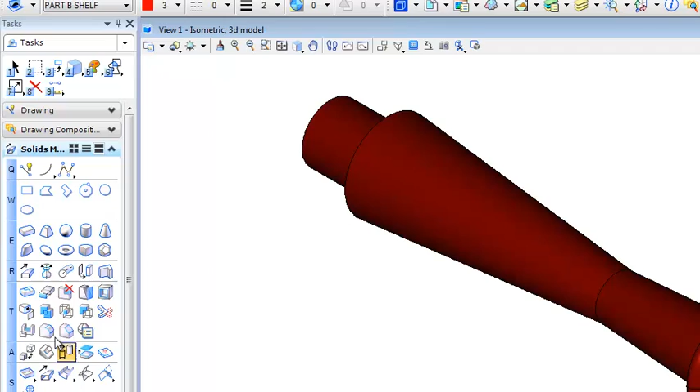It doesn't look like it's on a wood turner, so we got to smooth this edge out. So we'll put a fillet edge on. In addition to making outside curves, we can change this to say a 2-inch radius just to try it.

Left click right on that circle. You can see it smooths it out. Not quite enough though, so let's try a 4-inch just to see what that looks like.

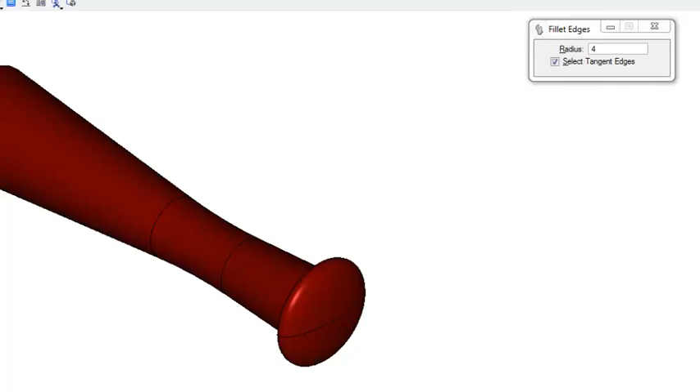There we go. So if we actually spin this around, we can see we got this nice dowel appearance, similar to what's shown on the drawing. So it's not going to be exact, but it's going to be close.

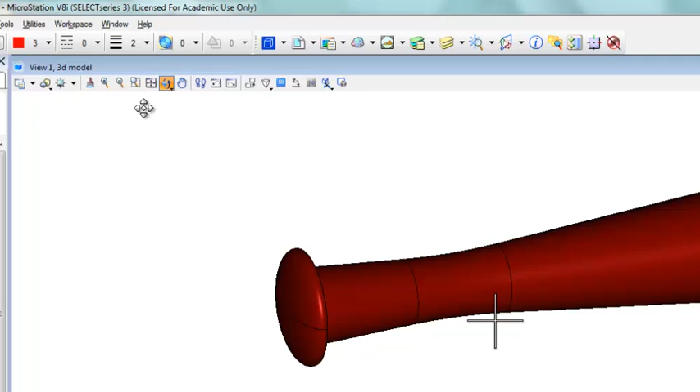So we know we made this peg a little bit shorter to fit in the hole, so we're going to have to determine how we want to put that in there. So I'm going to go back to a wireframe. We'll do a fit view and change it to an isometric.

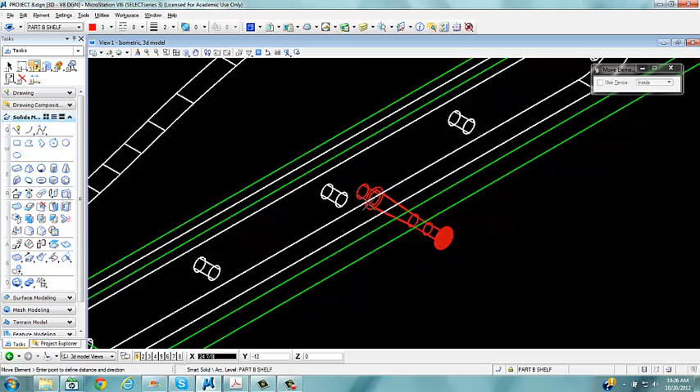So let me see if I can grab this right by the center point right there. See how I'm grabbing that right by the edge? The collar that's going to be up against the wood would go right here. We come over here into the center point. Hopefully I'm on the right side of the wood. Yeah, I am. And find the matching point.

You can see how my base now is a little bit short. So if there's glue or wood putty or something in there, it's not going to stick out.

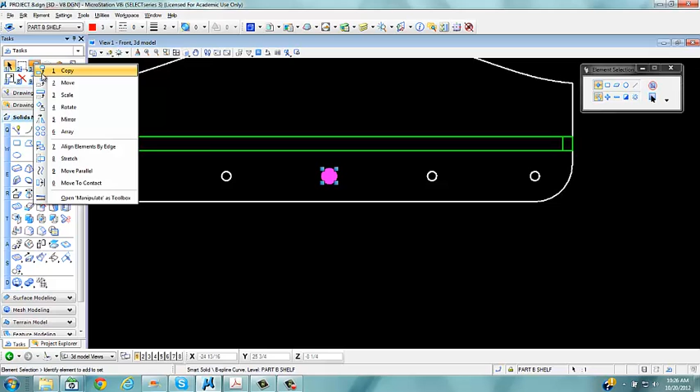So if we come around now to a front view, we can select this piece. And we know it was 5.5 inches apart. If we look back at our screen, these are 5.5 inches on center. So I should be able to just take that object by itself and copy it.

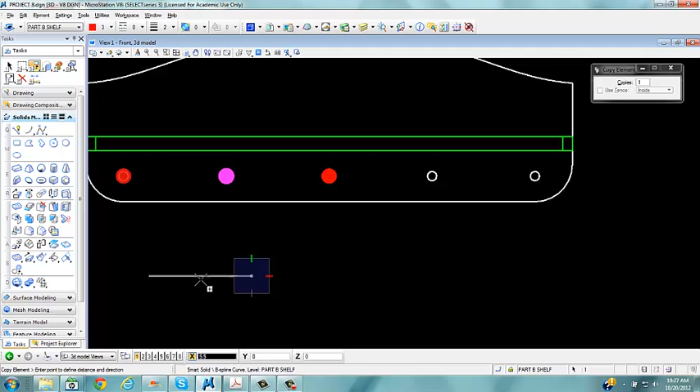And I don't want to snap to it. I just want to left click down here, and I know it's going to go 5.5. It's going to go 5.5 again. And then we can select it down here and go 5.5 and 5.5. It actually should index to that 5.5 anyway.

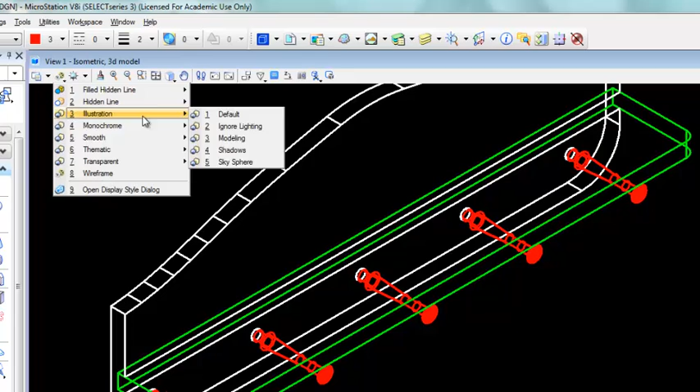So we'll look at this in an isometric again, change it to an illustration with shadows, and then we can rotate it around, and there's our 3-component rack.

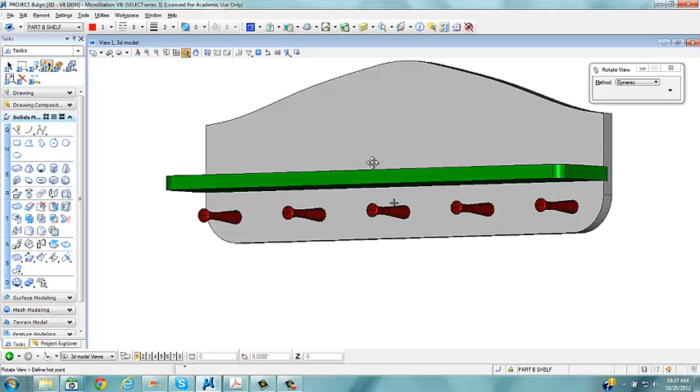So we've got some drawings now that we can work with. Let's go to our title block sheet, and we'll start renaming this one. This one will be project, I think we went to project 8. And you'll change the date and the titles.

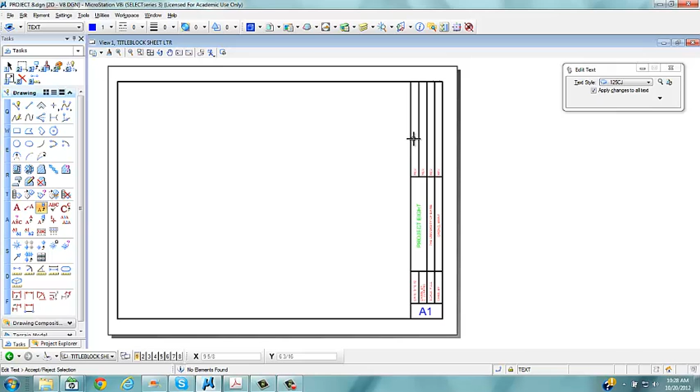But now, this is going to have to be brought in at a scale. Not sure what it would be. Right now, I'm thinking if it's 26 inches and this paper's 11 inches, I probably need to go to maybe a quarter scale, 1:4. Let's see what we can do.

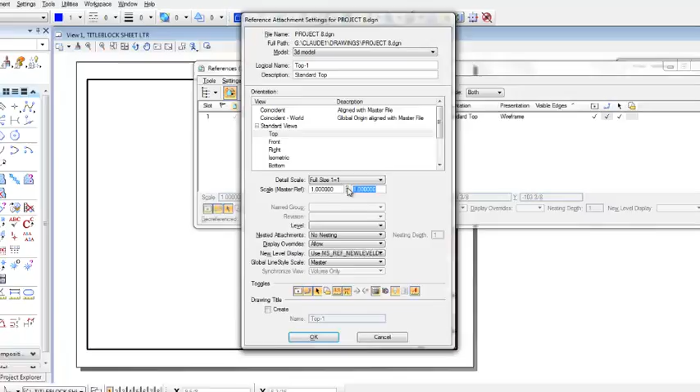So we're going to attach project 8. We'll go to our 3D model. We'll say our top view at, let's just put in 1:4. Should give us a quarter scale. You can see we can place that right there.

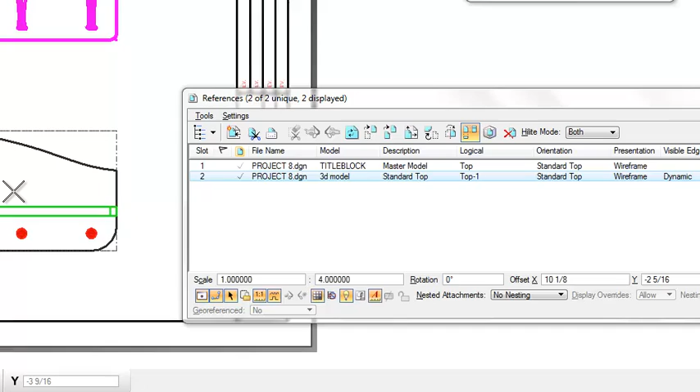And we can fold that down so we get the front view. And then we can fold that one along a vertical line, just like we did before. And we'll pull it over to the side.

So for now, let's just leave that the way it is. Let's go down to the bottom, and we can see the scale was set at full, so we need to retitle that. Instead of full, we're just going to type in quarter.

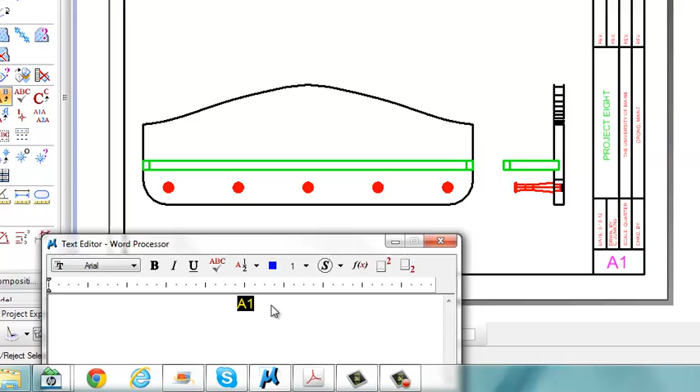I'll rename it to A8 for project name, just for the hell of it. And we'll put some text on here for, I'm going to use 1/8 inch center justified. I don't want it 90 degrees. And we'll type in top view.

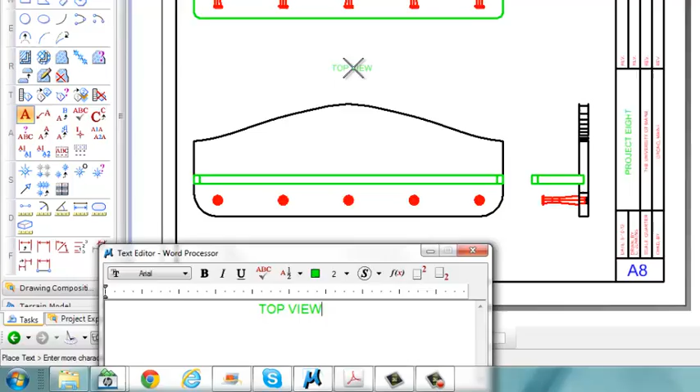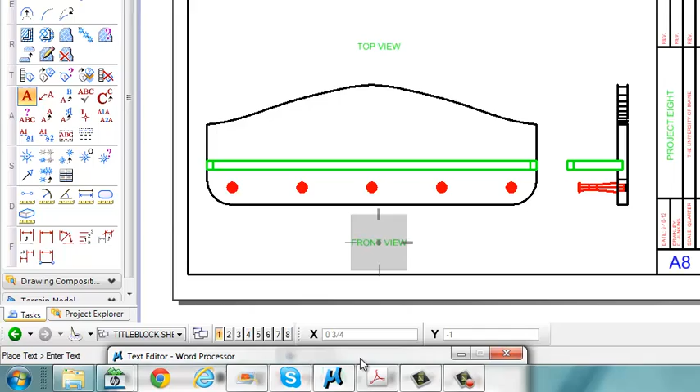Front view. Excuse me. Sorry. Lost my icon here. There we go.

And this would be our side view for right side view. We'll pull that right over here. Sorry again.

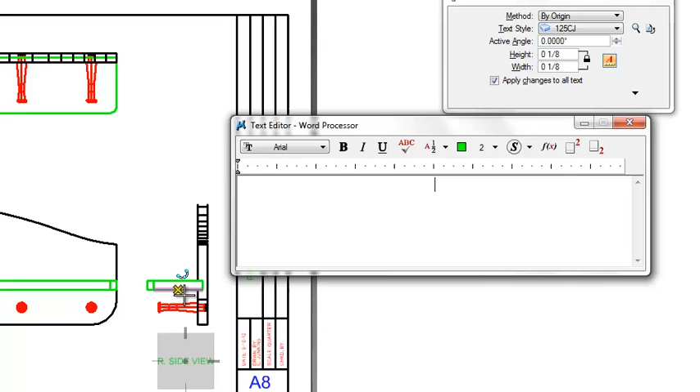Now, I want to do an isometric of one of the pegs so that we can show what that looks like. If we go to our reference tool and we're going to attach, same project again, model 3D isometric, this time at 1 to 2.

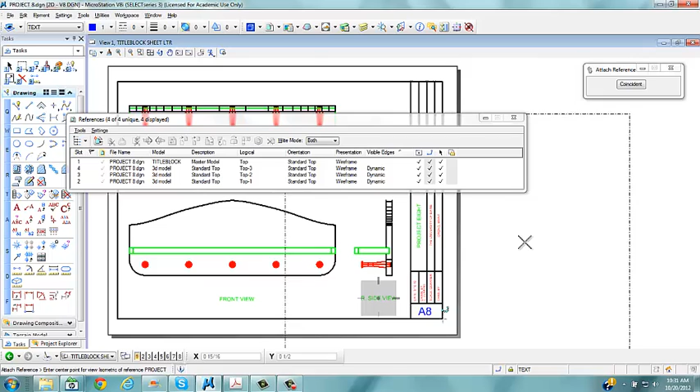Don't get concerned. And I'm just going to move this over to the side. There's our whole piece. But you'll notice with our level display, I can select that isometric and say I only want to see, oh goodness, I made a mistake. Alright, let's close this out for a second.

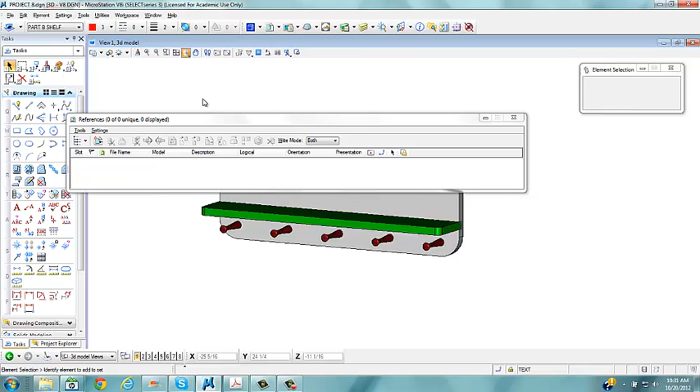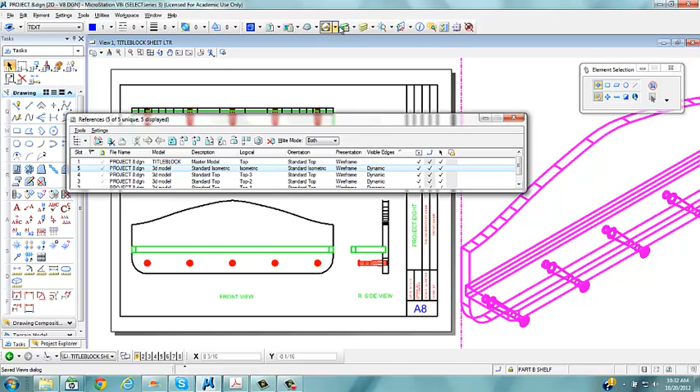So we go back to our letter sheet view, and now when I select this isometric, I don't even need to select it, but I can go to my level display, select that reference file, and say I don't want to see anything but part C.

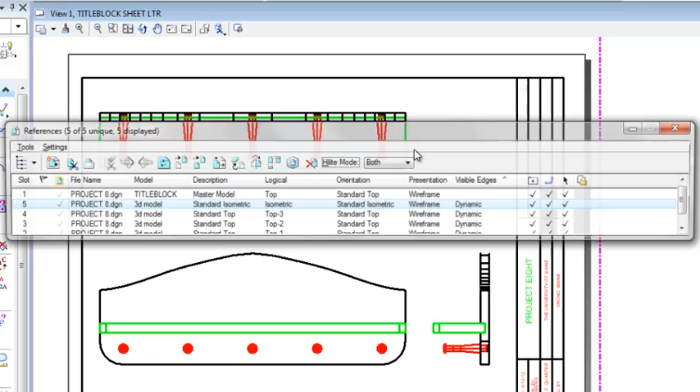And now here's another little fence tool we can use. If we go to our reference tool and look at this again, there's my isometric. I want to see the presentation of that as a hidden line and hit OK. So it actually gives me a line drawing of those pegs.

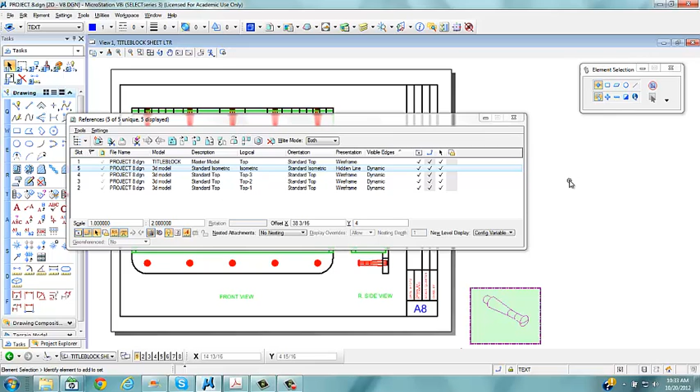So we can put some notes on it and whatnot. Now the other thing I want to do is put a fence around just one peg with our fence tool, and come over here to this little clip reference tool, the one with the scissors on it. Left click, active fence, left click again, and all I'm left with is just one peg to show. I can take my move tool and move that peg over here.

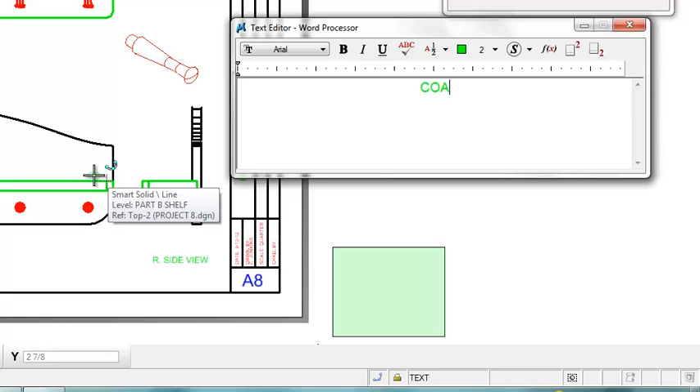So it fits into that location. And we can put some notes, and we'll put a little descriptor here, we'll call it coat peg. We'll place it right underneath this, and we can add some notes to it. So we're ready, I can take my fence tool to get rid of that again.

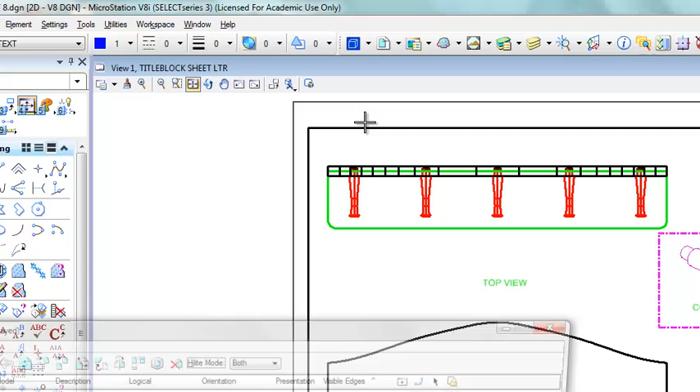Now we can look at this and say, okay, I want to start dimensioning it, but first we need to go back and do what we did before. We're going to select this first one, dynamic, and change it to legacy. Just do 1 to start with. We want it to be exact, just like we did before, hidden lines forced on. We want that color to be 3.

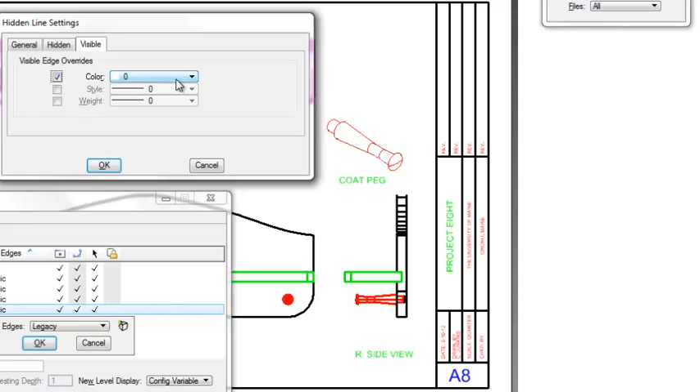And our visible edges want to be color 2 again, and style 0, we'll call it weight 1. Hit OK and left click.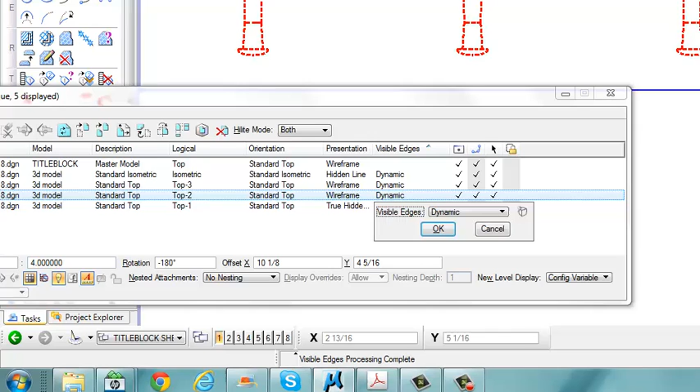Now, if I take this next one, you can see there's my drawing, shows a top view looking down through the shelf. We're going to do the same thing with this one. I just need to say change it to legacy, hit OK, and it remembers the settings from the previous one. So we'll do this one again, say legacy, hit OK. So it's a very quick process now to do those. There's our drawing, shows our pegs in there, our radius pieces, everything looks pretty good.

And now we'll take our dimensioning tool, we'll go to style. I want to go to architectural, but let's hit the magnifying glass and copy this one and call it ARCH inches, because I want my units now to be in just master units with a label. I want my master units to be in inches, the inch mark to an accuracy of 1/16 of an inch.

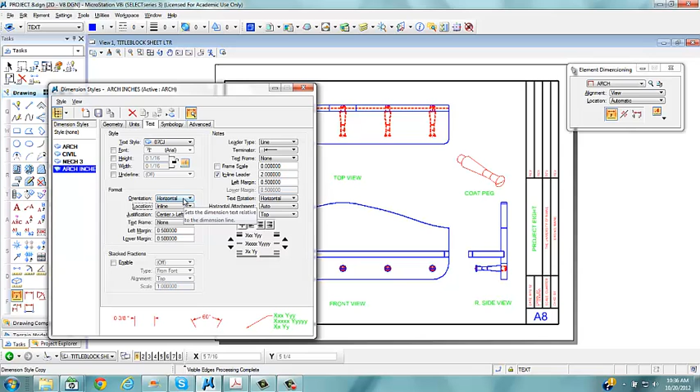Text, we'll keep it at 07 center justified for now. It should be, probably for a small drawing like this, let's keep the orientation horizontal and inline like a mechanical, because it's just going to be like a mechanical dimensioning, but it's going to use architectural, so we're going to see the dimensions in fractions. And we'll save that. Let's try it. We got architectural inches now.

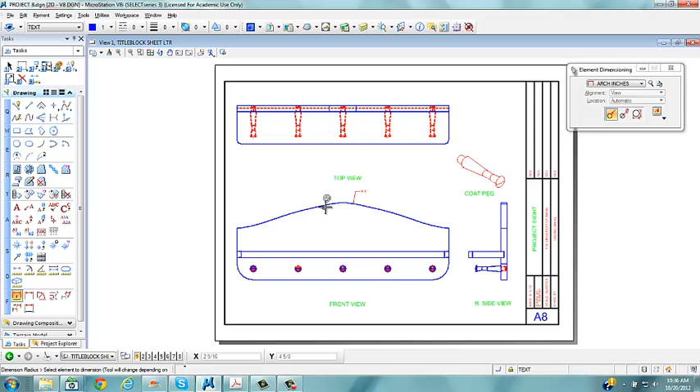So I'll start with some radius pieces. Rather than that square, I can actually show that it has a radius on the top, and we could kind of limit, we could put our dimensions from this top point. We went out 5 - oops, no, we didn't do that. Not really sure how to, I guess we could start here, and we may have to hit an N.

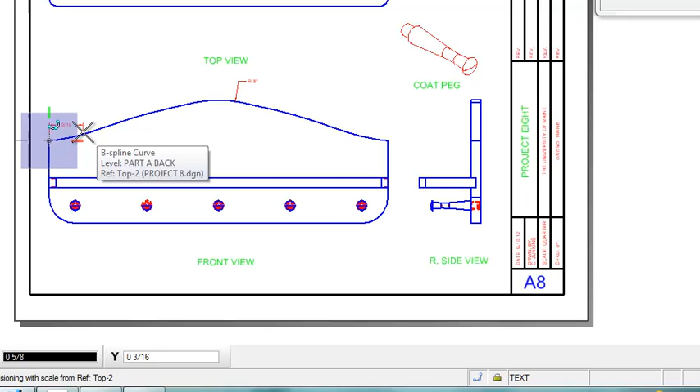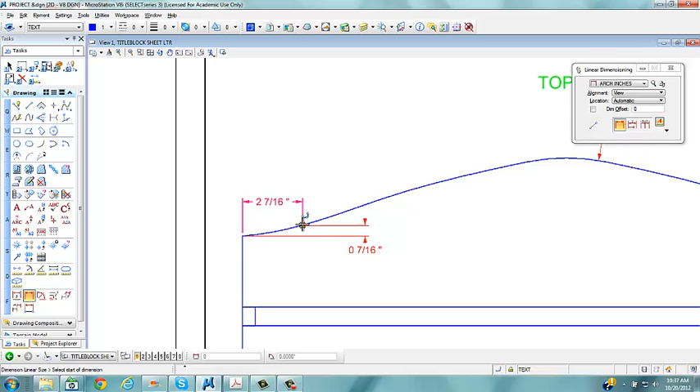So you can put some dimensions that would indicate where some of these points would be located. You gotta be sure to grab a point. Oh crap, sorry.

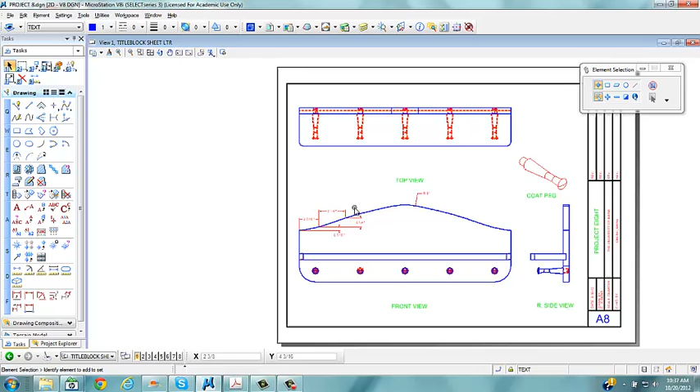Yeah, it doesn't work very well. Might be better for us to show it like they do on the drawing. So if we go back to our model now, this wouldn't show up anyway. We could put a little grid pattern in behind there.

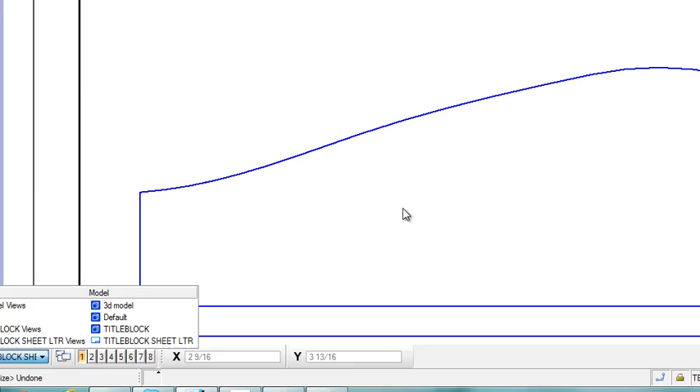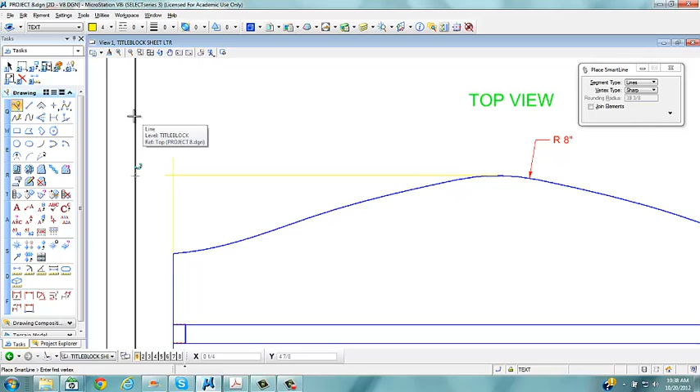And we still can. We'll just use our color yellow, which is our lightest color. We'll draw a horizontal line from the top over, another one from here to here. This is 1 to 4, so if these are in 1-inch squares, we'd move this 1/4 inch at a time. Copy this one, 0.25 - yeah, that works.

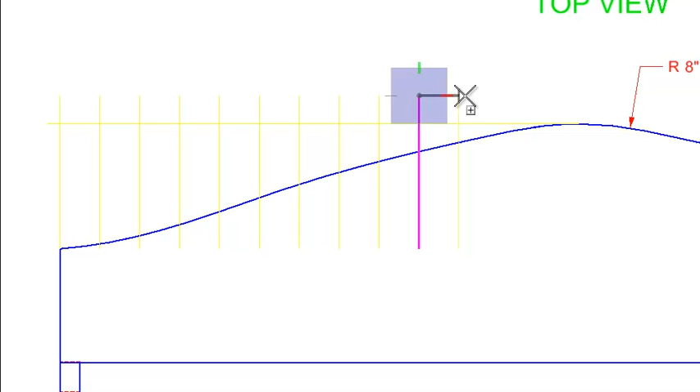That way we don't have to put any dimension lines on this. So sometimes you're designing on the fly, and I'll just grab this one, drop it down. And that's just going to show up as a very gray line in the background, so somebody printing this out and drawing it would know that.

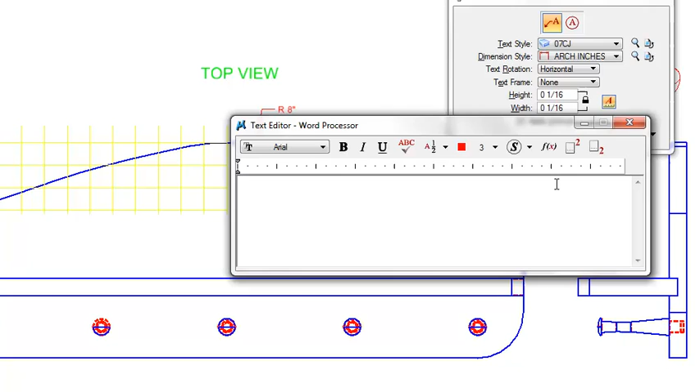What we'll do is put a note on this that says - we'll take our note tool, we want to be in 07 center justified, and we'll say grid 1 inch by 1 inch, and we'll just select here. That makes it easy.

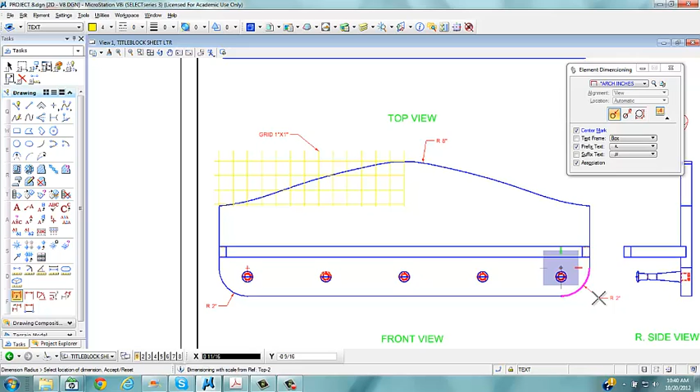Now we can go back to dimensioning. We've got a radius here. I'm just going to left click on this corner, drop it down, and say I want to see the radius, but I want to see a center mark too. So there's our radius of 2 inches, showing the center mark for where that would be on the screen. 2 inches on this side.

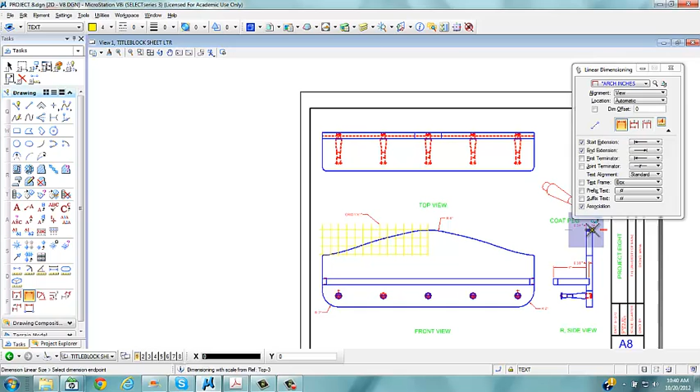Now we can put some more dimensions. We're just going to go to this edge, 4 inches exposed, 3 inches in. Good place to do that one. Show this board at 3/4 of an inch thick.

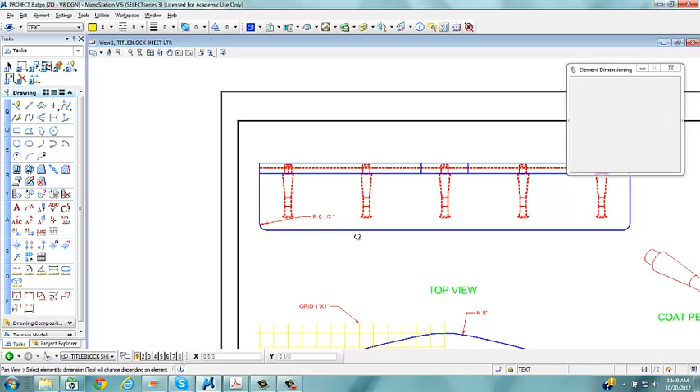We've got a couple more radiuses here we can put on. That one's kind of in an odd spot, so there we go. Don't be afraid to move things around as you're dimensioning. Don't just drop them wherever they fall. And this one we've got room on the outside that we can show the radius.

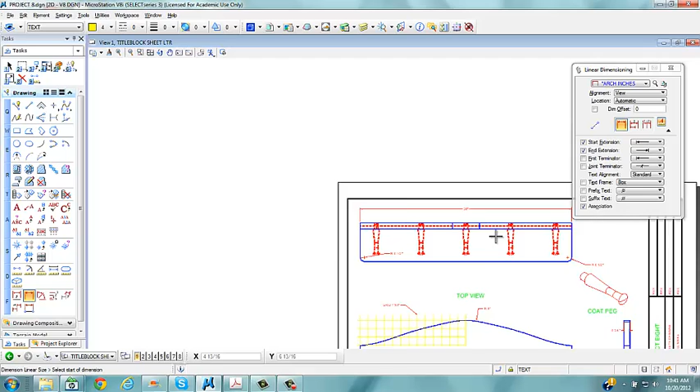Now we can put some overall width dimensions on here. We'll put the height, thickness of the board, and then we can come down here. Whoops.

Do a little modification here. Bring this out, so it shows up good, but now it interferes with this one, so I can take my modify. Should be able to just maybe even take the move tool and just move this. I don't want to do that. I want to modify it, I guess.

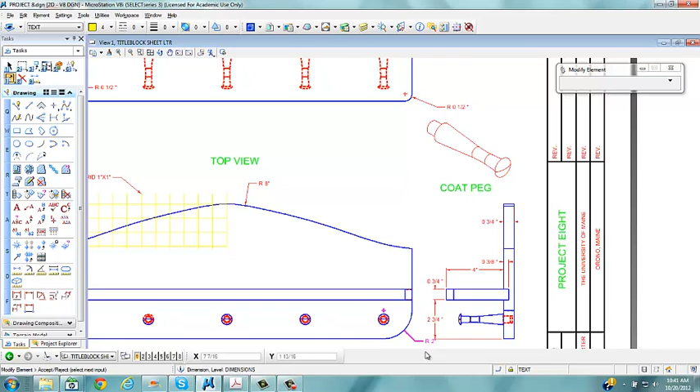Much better. And we can put a general note. It just says material to be white pine.

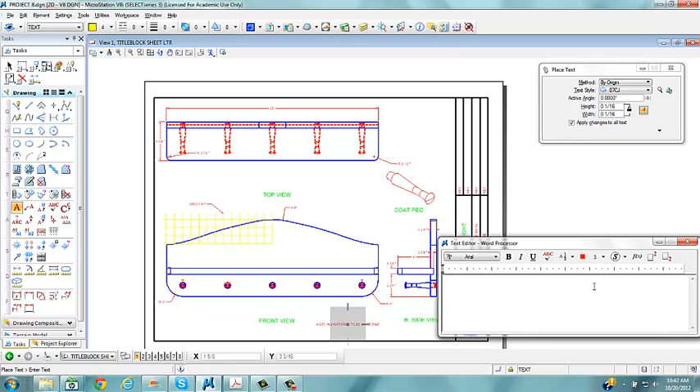Stick that down here. And I want to put a little NTS, stands for not to scale, so nobody's scaling off this coat peg. Everything else would be quarter scale, except for this piece.

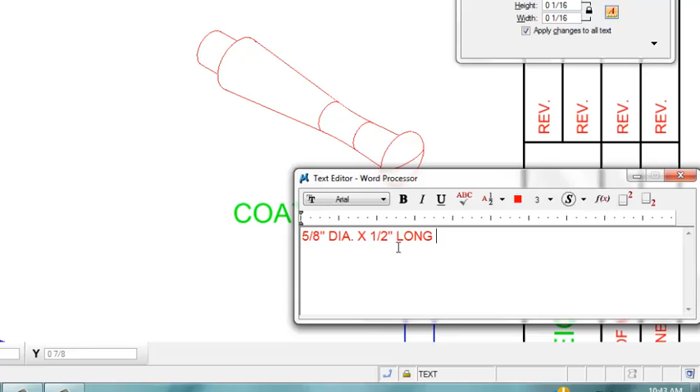We want to show that the peg is going to be, put some notes on this, this is going to be 5/8 inch diameter by 1/2 inch long insert. Note that right there. Dowel base was 5/8 inch diameter.

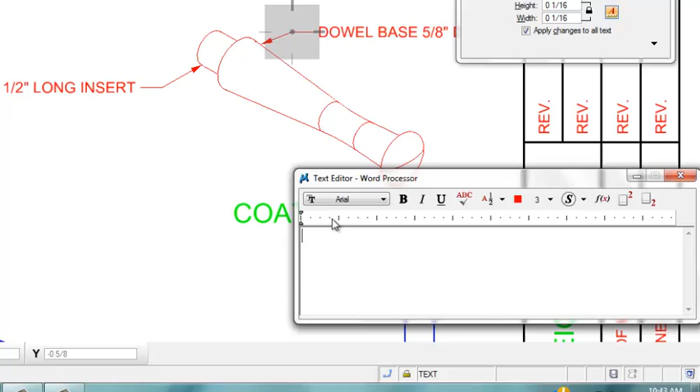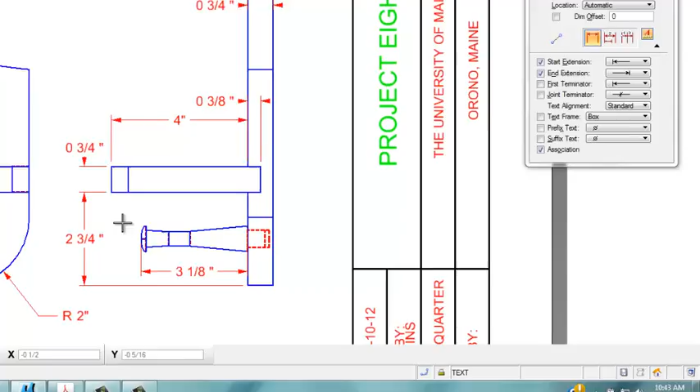We have another place, and we could actually put the exposed length, which ends up being 3 1/8 inch. Let's pull it down. And we know that to the center point of this, 1 3/8 inches. We want to note that the center to center dimensions are going to be 5.5 inches.

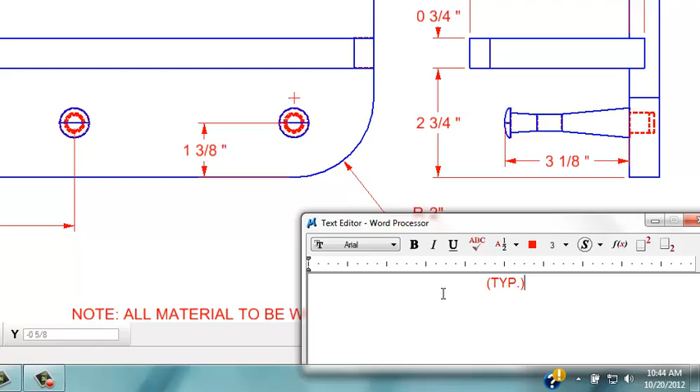And then underneath that, just to save space, we'll put parentheses TYP period. Maybe I should edit that, it'd be TYP period. Maybe before that we'll say O period C for on center typical. That looks better.

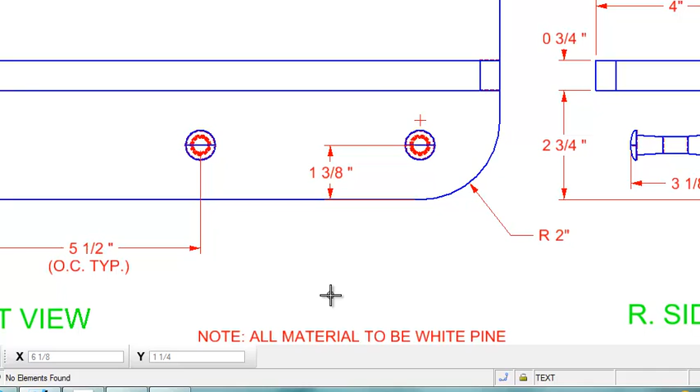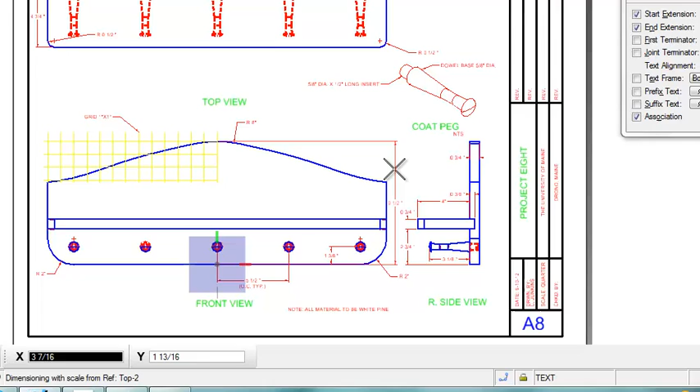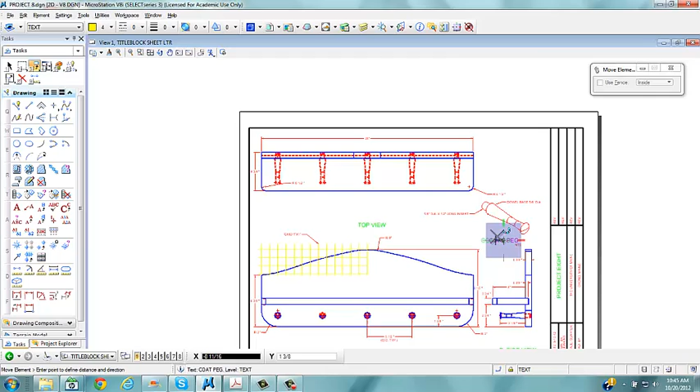Looking to see if we have any other thing we probably want to dimension overall from the top to the bottom, I'll pull that out on this side. It was 9.5 inches. If we go from this point to the bottom, we can see that our bottom curve is going to be 6 3/8 inches. I know it's a little tight, but again, we're working on 8.5 by 11 sheets. Just take some time, organize things, move things around so that they're not crowded.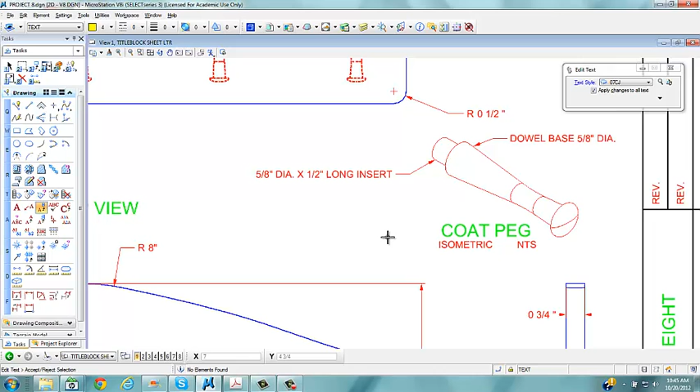This over here, and I'm going to put in isometric so they know the orientation of this peg. This was 1/2 inch diameter to the middle, so we can put a note here that just says 1/2 inch. Whoops, find the keyboard. Inch diameter.

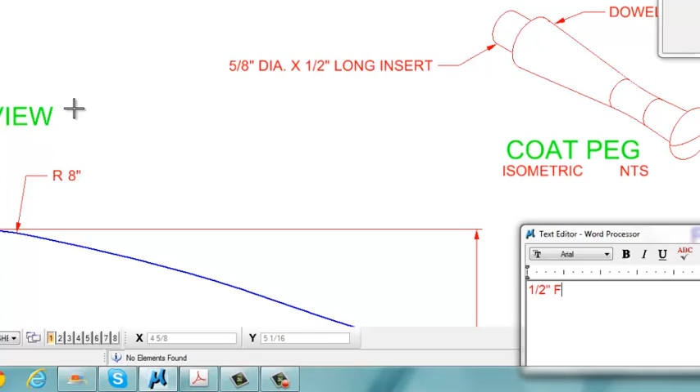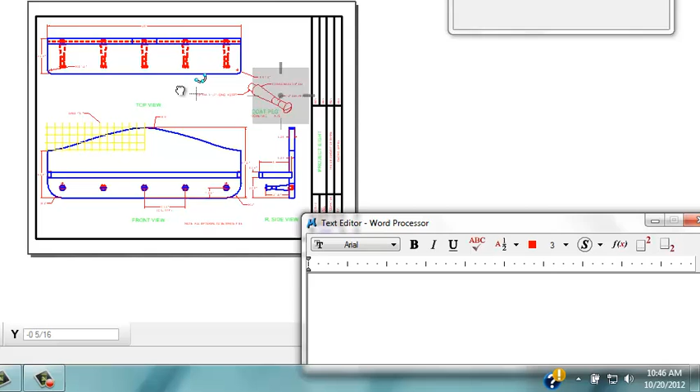APPROX, approximate, and we'll put a note right there. I think we pretty much got it. Maybe a few things I'm missing, but everything looks okay here. We'll do a Control P.

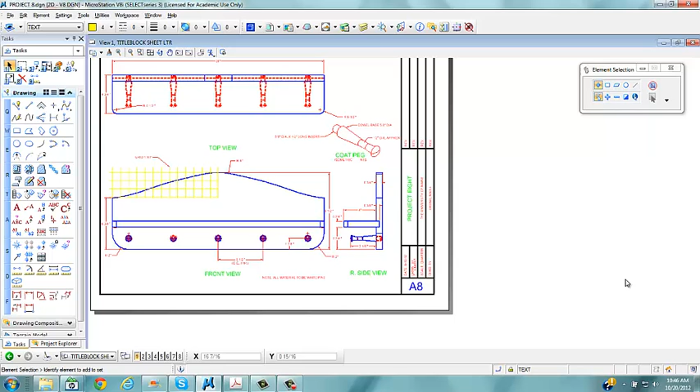Not sure we'll be able to get this all done in one class, but thought I hit Control P. Thinking, resymbolization, attach pen table. We'll go to our utilities, there's my pens. Didn't pick up that red on that outline. Did that time.

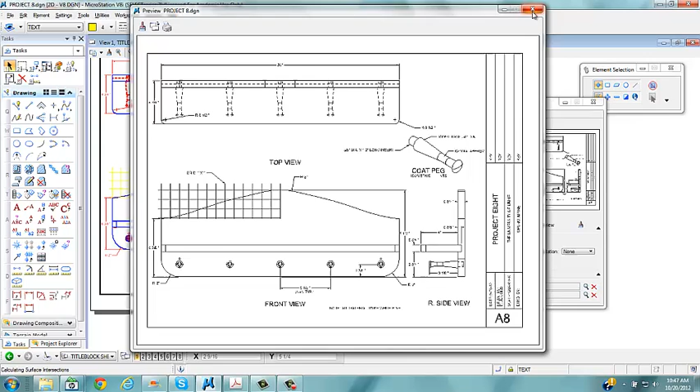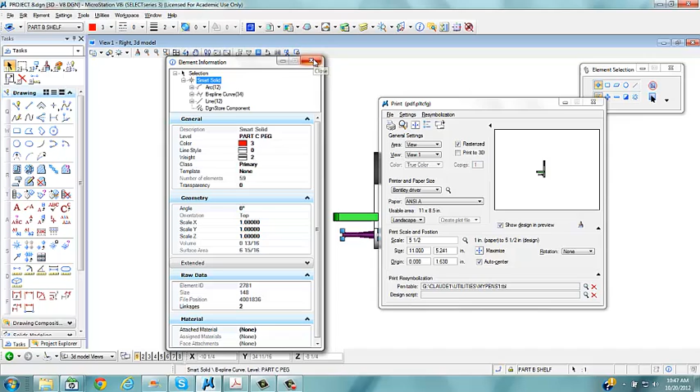So that looks pretty good for my drawing. I just changed it to monochrome. If I go back to my 3D model, there's the color of that peg. If you take this information tool, it says it's color 3.

Might be just because it's in a rendered mode, so we won't worry about it. We won't mess with it right now. We'll leave it the way it is. True color. We've already got our pen table on. I'll just double check, and we'll do a print.

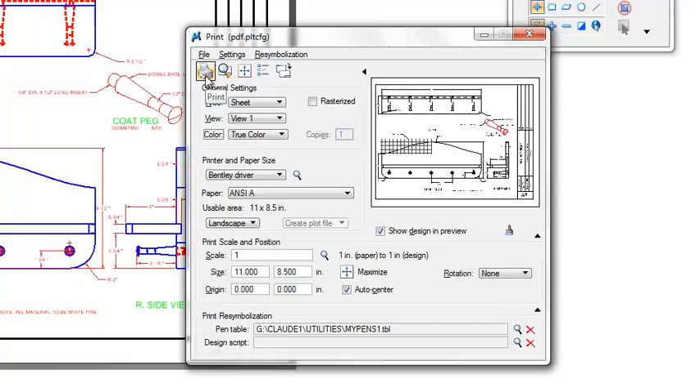I'm gonna put this in our removable drive. There's my PDF drawings. We're going to say Claude Junkins 8, and of course your name would be the one on it. Hit save.

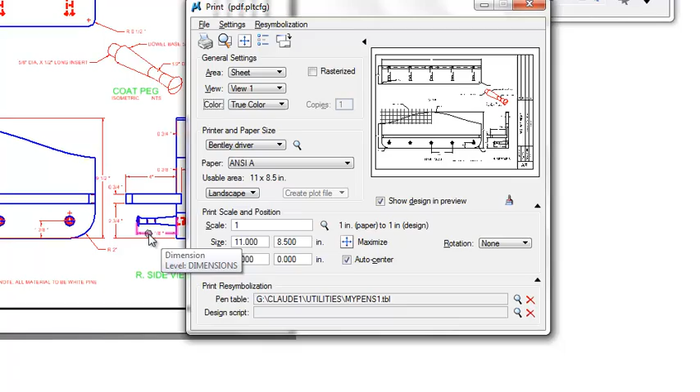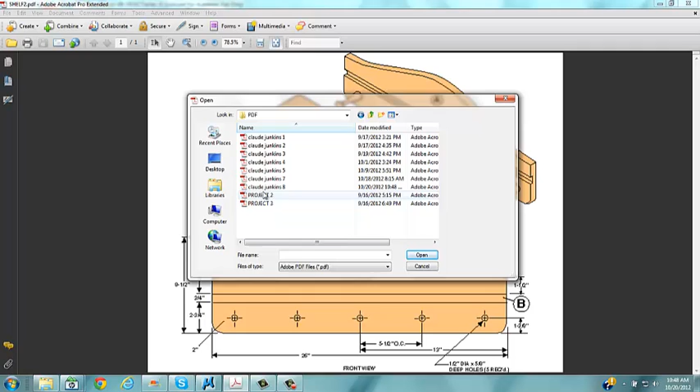Finish creating the file. We'll go here, say file open, just to check it. It's always a good idea to check your drawings, and I think this is it. Draw a PDF. So there's our drawing, and I like to kind of zoom in.

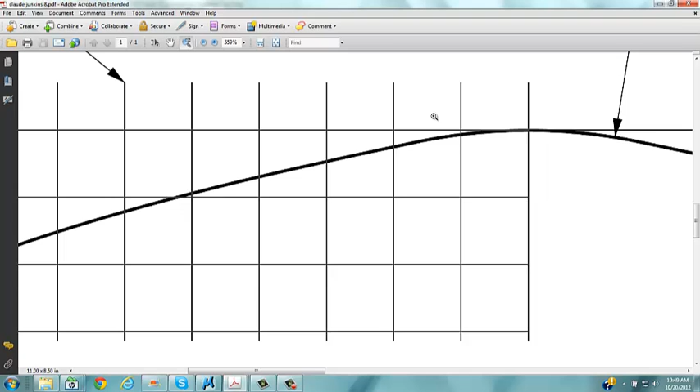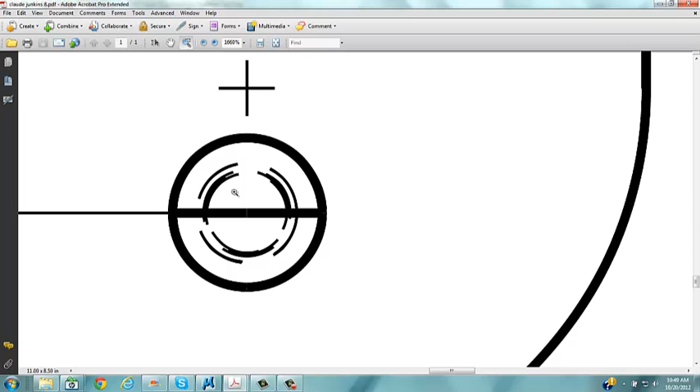You take a look, there's our yellow lines that show up very light and gray. You can see they got that gray tone to them. Fit view, everything looks good. Nice line weights over here. Hidden lines are good. This is just what you're seeing here for the hidden lines, are those kind of tapered pieces on that unit. I think everything looks pretty good here.

So front, right side, project EIGHT, good deal. You're going to upload that to the Blackboard, and we'll get that graded. So that is your assignment 8 for this week. To start with, we may end up doing more later on, but this is what we're going to end up with. All right, thanks.